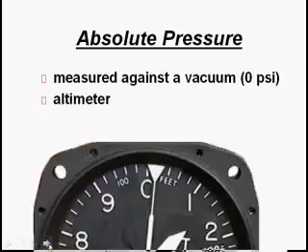It's calibrated to read low altitude under high pressure, that is, at sea level. It shows 0 feet, but that's really at a high pressure, 29.92 inches of mercury if it was a standard day. However, if you duct taped an altimeter to the side of the space shuttle and started going towards a vacuum, it would read higher and higher and higher. And if you had a magic altimeter that didn't break, it would read infinitely high as you got into space and there was no pressure. So here's the Kollsman window, and it doesn't quite read 29.92. Hopefully you've seen an altimeter before.

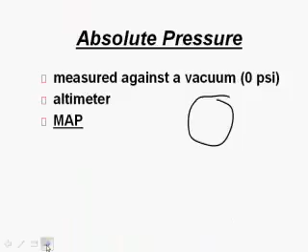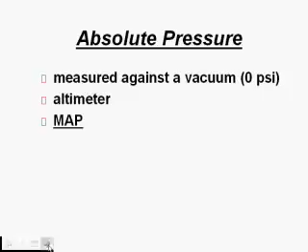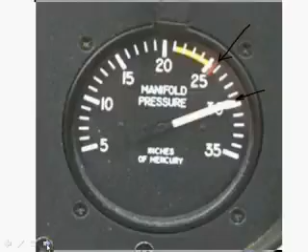Manifold absolute pressure, MAP, is talking about the manifold pressure gauge on piston-powered airplanes that have constant speed propellers. MAP is a 3-letter abbreviation for manifold absolute pressure. Here's a picture of a manifold pressure gauge out of a Robinson R22. Now this engine isn't running, so it's reading outside air pressure, and you can tell that it's just a little bit below 30 inches, so it's probably pretty close to a standard day near sea level. This manifold pressure gauge has a red line because they've derated the engine to produce less power than it actually can. That way it'll last a lot longer without failure.

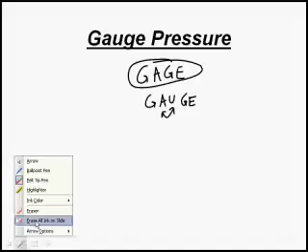Gauge pressure, just so you know, GAGE and GAUGE are both pronounced the same, and they have the exact same meaning. I usually spell it gauge because I don't have to remember which comes first, the A or the U, although I guess in alphabetical order A comes first, so maybe there is a way to remember it.

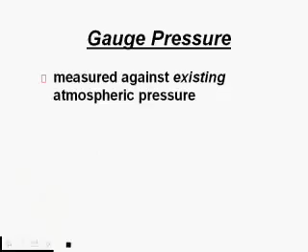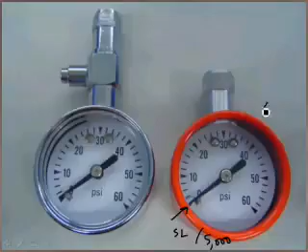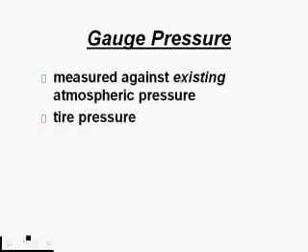Gauge pressure gauges display a pressure that is whatever is above the existing atmospheric pressure. A typical example is a tire pressure gauge, and these will read 0 whether you're at sea level or you're at 5,000 feet pressure altitude or at 10,000 feet pressure altitude. It's because there's actually a hole underneath in the back so that it can always reference itself to atmospheric pressure. And that works out pretty good for a tire pressure gauge, because you want to know what's the pressure inside of the tire compared to the pressure on the outside of the tire.

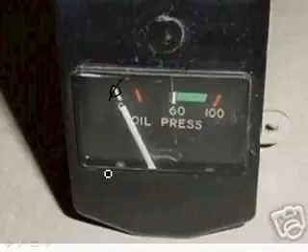Piston engine oil pressure gauges are also typically set up this way. Here's one out of a Cessna, and you'll notice that nothing's getting to it. This is actually taken out of an airplane, and it's reading 0. Again, it has a hole drilled in the back of the gauge so that the gauge knows what atmospheric is, and that's the pressure inside of a piston engine. It's vented to atmosphere, so you want to know what's the pressure of the inside of the oil system compared to outside atmospheric again. And hydraulic pressure is typically the same as well.

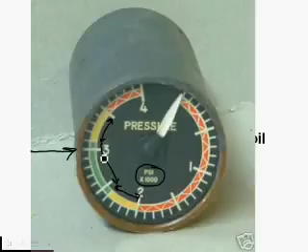Here we've got a hydraulic pressure gauge. This one is probably supposed to be at 3,000 psi. We've got here psi times 1,000, and there's a red arc. It's really bad if it's below 2,000. We've got caution between 2,000 and 2,400, and we've got caution between 3,100 and 3,500, and of course the lovely green arc between 2,400 and 3,100. Hydraulic pressure gauges are also a common gauge pressure gauge.

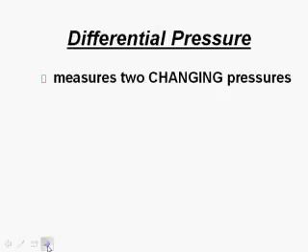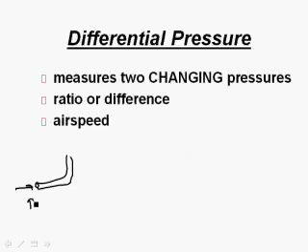Differential pressure, my personal favorite, is where you have two pressures that are changing at any moment, and you need to know the difference or the ratio between them. Airspeed indicators, for instance. Here's an airspeed indicator. Airspeed indicators take the outside air pressure and compare it to the pressure inside of the pitot tube. So if you have a pitot tube coming in here, we're going to have ram pressure, and we're already going to have static pressure in there, and it's going to compare it to a static port.

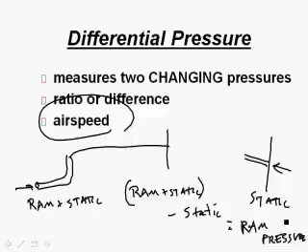And essentially the airspeed indicator is just going to take ram plus static, subtract static. That's going to give you ram pressure, but instead of displaying a pressure in psi or inches of mercury, it's calibrated to read it in indicated airspeed.

Engine pressure ratio. If you're flying jets, or you want to fly jets, this is going to be important. Here we got a jet engine, combustion chambers, air's coming in, air's blowing out the tailpipe. I need a longer exhaust pipe here. And there's going to be a probe. And air's going to get in that little tiny hole, and there's going to be a probe in the tailpipe, and air's going to get pushed into there.

Now when the engine's running, hopefully the pressure in here is really high, static pressure, and the dynamic pressure or velocity is also going to be really high, and hopefully in here the velocity or dynamic pressure is going to be smaller and the static pressure is going to be smaller. So this side here is always going to be larger pressure.

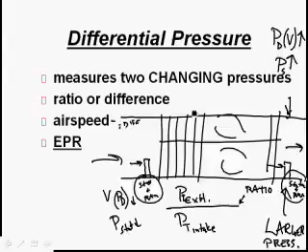And so effectively it's going to be the pressure right here, pressure in the exhaust, pressure total in the exhaust, pressure total in the intake. But this is going to be a ratio. It's going to divide it instead of airspeed where it's a minus sign or a difference. And we're always going to have this the pressure in here be static plus RAM, and the pressure in the EPR probe in the tailpipe is going to be static pressure plus RAM. And all this total here and this total here could all be changing. These two pressures could be changing all the time. In this case, we're just using a ratio of two different pressures.

So here's an EPR gauge. It reads 1.01. That's just a hair over 1. There should be a dot right there. And as you push the power lever forward in a jet, the ratio of these total pressures goes up. And here's a bug. So this is saying it's going to be about 1.9 for takeoff, probably is what that's being used for.

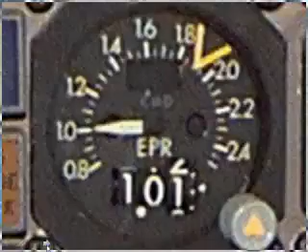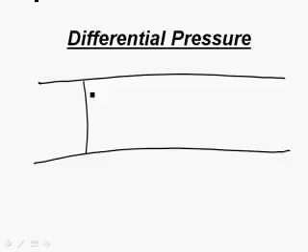Turbine engine oil pressure. See, I need some space to draw in. Here we go. Turbine engine oil pressure. Again, we got a jet engine. And we have bearings holding the shaft in place. And we're going to have some reservoir.

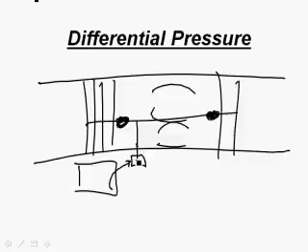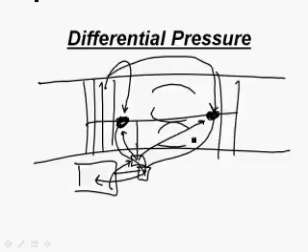And we're actually going to need a pump running off of the engine to suck oil out of the engine and then pump it to the bearings. And there's going to be another pump, a scavenge pump, that sucks the oil back, and pumps it into the reservoir. And a lot of times on jet engines we take bleed air off of the compressor and pump it into the bearing chambers, and this bleed air is going to go through the scavenge pump in here into the reservoir, and it's going to pressurize the oil reservoir.

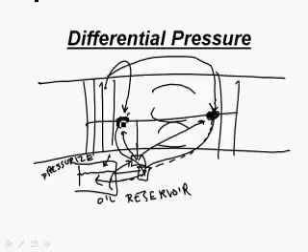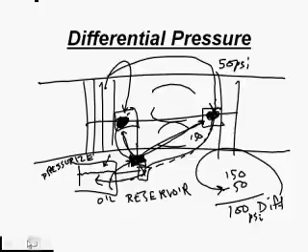And so it's also going to be pressurizing the bearing chambers. So let's just say that it's 50 psi coming from the engine compressor pumping into these oil bearing chambers. If the main power pump, the main pressure pump, pumps it in at 150 minus the existing pressure, means we only have a difference. You notice it's a minus sign. We only have a difference of 100 psi, and that's very typical with jet engine oil pressure gauges, since we're going to pump air into the bearing chambers, that we're going to need to know the difference between these two pressures. And so it's very common for jet engine oil pressure gauges to be differential pressure gauges. Of course, here's the low red line, here's the high red line.

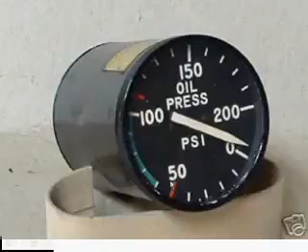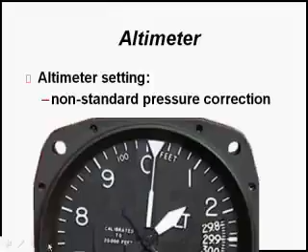Altimeters. And of course everybody knows about altimeter settings. They're for non-standard pressure correction. Of course I already mentioned the Kollsman window. So you can correct the altimeter for non-standard pressure.

Now what a lot of people don't understand or realize or think about is that you really need a temperature correction. Fortunately, temperature doesn't go that far off, and if you're up in the air you don't worry about it too much, because if everybody has the same altimeter setting, then everybody's going to be off a little bit. But generally speaking, we don't have in aviation a way to correct for that non-standard temperature. However, if you're going to be landing where it's really, really hot or really, really cold and it's IFR, you may want to look up non-standard temperature correction, because your missed approach point might be a little higher or a little lower than you might have thought. But generally we don't use standard temperature correction factors.

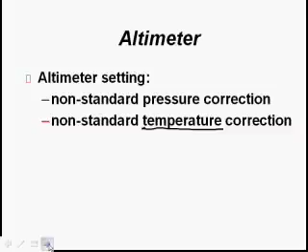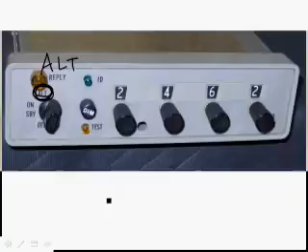Automatic altitude reporting systems, essentially that's your encoding altimeter. That's if you rotate the switch on your transponder to altitude, and that's transmitting the pressure altitude inside of your static system, and it's rounded to the nearest 100 feet. So let's say you're at 5,500 feet pressure altitude inside of the static port, inside of the static system. It's going to get rid of this 0, and it's going to transmit 550.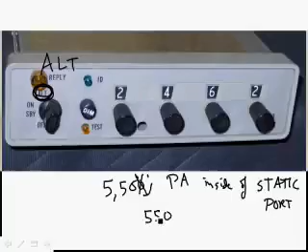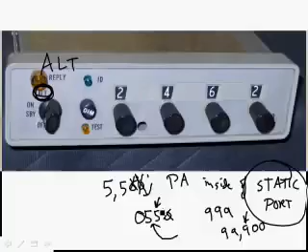It's not even going to transmit that one. It's going to transmit 055, and the air traffic control computers will put the comma in the right place. So if it transmitted 999, that would be 99,900 feet. It rounds it, or corrects it, to the nearest 100. And it's what's inside the static port. So if you set the wrong altimeter setting in your altimeter, your encoding altimeter transmitting your altitude rounded to the nearest 100 feet is still going to transmit the pressure altitude inside of your static port.

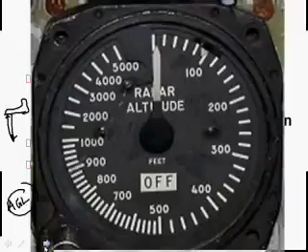Radio altimeter, radar altimeter, it means the same thing. It's essentially telling you AGL information. This is a radar altimeter out of an F-4 Phantom jet fighter, and as you're flying along, it sends down a radar wave, and it bounces back up, and it measures the time. So that's how it's giving you AGL. You typically don't find these in smaller airplanes.

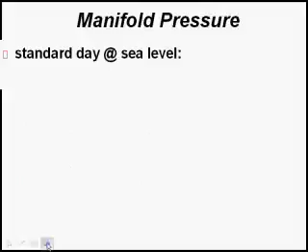Manifold pressure is found on piston-powered airplanes that have constant speed propellers, so that way you can set the power with the manifold pressure while the RPM stays constant.

On a standard day at sea level, you can measure pressure different ways. You might say it's 29.92 inches of mercury. Hg is the Latin abbreviation for mercury. 29.92 inches of mercury is the pressure on a standard day at sea level. Outside of the United States, altimeter settings are in millibars, and the altimeter setting would be 1013, and that's also equal to 14.7 psi. We already know 14.7 versus 29.92 is really, really close to 2.

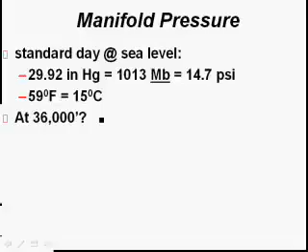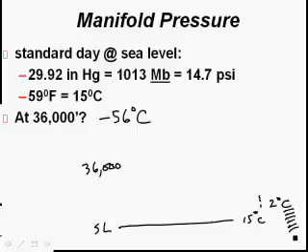Temperature, of course, you've known this. Hopefully, on a standard day at sea level, it's 15 degrees Celsius and also 59 degrees Fahrenheit. At 36,000 feet, standard day is minus 56 degrees Celsius. And in fact, that works really well. If we're at sea level and go up to 36,000 feet, we know it's 15 degrees Celsius. And every 1,000 feet, there's a 2 degrees Celsius change, the standard adiabatic lapse rate, and this is almost perfect. It only is off by like 2 degrees all the way up to 36,000 feet.

Interestingly enough, at 36,000 feet, it's the isotherm, and the isotherm goes all the way up to 66,000 feet. It varies a little depending on what book you read, but from 36,000 feet it's minus 56 degrees Celsius, and it stays that way all the way up to 66,000 feet. It's still minus 56 degrees Celsius. So from sea level up to 36,000 feet, we have a 2 degrees Celsius change, 2 degrees Celsius per 1,000 feet.

So at 5,000 feet, we could figure it out. It's really nice and easy. It's 15 degrees Celsius, we go up 5,000 feet, 5 times 2 is 10, so 10 from 15 is 5 degrees. So at 5,000 feet, it ought to be 5 degrees Celsius, on a standard day. Now we're not talking about sea level - the isotherm is from 36 to 66,000 feet, and on a standard day, it's minus 56 for that solid 30,000 feet in there.

The Armstrong line, interestingly enough, is based on pressure, and it's at about 64,000 feet. What's interesting - if you've ever made brownies or a cake at high altitude, you read the high altitude directions, it'll say do something different, put in a little less or more oil or water or flour, maybe cook it at a different temperature. It's because the temperature of water boils differently at different pressures. At sea level, water boils at 212 degrees Fahrenheit, which is 100 degrees Celsius. As we go up in altitude, the boiling point of water gets less. In fact, if we go all the way to 64,000 feet, the boiling point of water there is 37 degrees Celsius. Interestingly enough, 37 degrees Celsius is 98.6 degrees Fahrenheit.

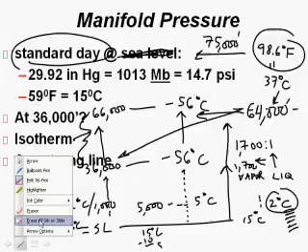This probably sounds familiar because your blood stream, most people's temperature is about 98.6 degrees Fahrenheit. What that means is if you're above 64,000 feet, let's say you're flying along at 75,000 feet, and the airplane depressurized, the pressure isn't going to keep the water in a liquid state anymore. It's going to start trying to expand to a vaporous state. Interestingly, the ratio of expansion from liquid to vapor is 1 liter of water turning into 1,700 liters of vapor. So your body is going to try to expand quite a bit. I think it probably wouldn't be very pleasant. So if you're above the Armstrong line, you probably ought to wear a spacesuit and have a pressurized cabin. That way, in case you depressurize, your spacesuit will save you.

And of course, we know the rule of thumb from sea level up to about 15,000 feet: 1,000 feet of altitude gives you 1 inch of mercury less. So at sea level if it's 29.92, and we come up to 5,000 feet, we take 29.92, subtract 5, and we get 24.92, which would be the approximate outside air pressure in inches of mercury at 5,000 feet on a standard day.

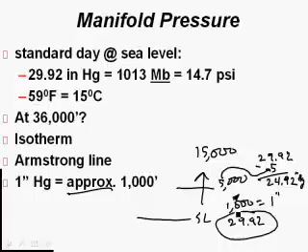Of course, every day is not 29.92. What's really cool is you can actually take the altimeter setting and do this calculation to check and see if your manifold pressure gauge is accurate.

So let's just say you're at sea level and the altimeter setting is 29.92. This makes it really easy. 29.92 minus 0, because we're at sea level, is going to be 29.92. So our manifold absolute pressure gauge on our reciprocating engine airplane with constant speed propeller, the needle's going to point to 29.92.

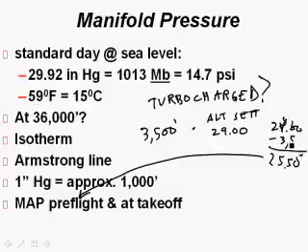You're going to read 25.50 inches of mercury during pre-flight. But if you have a gauge that looks like this, it's got a red line on it.

This is telling me, when I found this on the internet, that this is turbocharged. This is off a twin-engine airplane, it's hard to see, but there's 2 arrows in there, number 1 and number 2.

So this gauge is taken out of the aircraft, and it's showing a little over 22 inches. That's telling me it's not on the standard day at sea level, it's probably at a high-altitude airport where this was taken. But in a turbocharged airplane, you push the throttle all the way up to the red line. So you don't have to calculate what the takeoff manifold pressure should be. If it's a turbocharged airplane, it should come up to the red line.

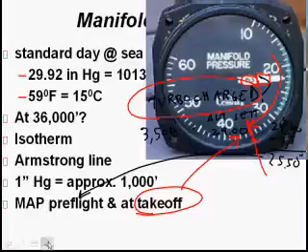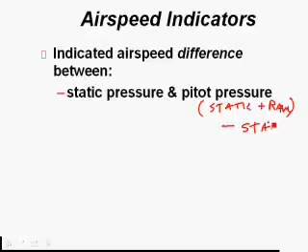Okay, airspeed indicators. Of course, I already covered the fact that airspeed indication takes the pitot pressure, which is really static plus ram, and subtracts the static to give us ram. But it's really calibrated and indicated airspeed instead of PSI or inches of mercury.

If you want to do true airspeed, of course you've tried this before. True airspeed, you can correct it for temperature and altitude, just like on those airspeed indicators, or you can do it with your whiz wheel. You have to say, okay, I'm at this pressure altitude and I'm at this temperature, and it'll change.

Essentially, the higher you go in altitude in general, true airspeed gets higher compared to indicated. So at altitude, you might be showing 100 knots indicated, but you might be doing 120 knots true. Now, you only have to get indicated airspeed to true airspeed by using temperature and pressure altitude until you're flying close to Mach 1.

As soon as you get close to Mach 1, you're going to have to take into account temperature and altitude and compressibility. Look at that, 3 I's in a row. Compressibility.

As you're flying along, if you got a static port coming in the wing, if you're flying up, like 0.7, 0.8, 0.9 Mach, it's going to be pushing the air in here and it's going to compress it. So you're going to get a higher pressure than you would otherwise, and you're going to have to take this into account if you're flying close to Mach 1.

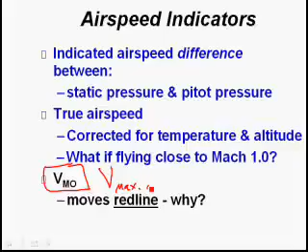Let's say, here's actually a picture. I've retouched it to make it look a little more clear. This is an airspeed indicator out of a Boeing 757 on the ground. Right now, it's showing 30 knots indicated airspeed. This is just a repeater in digital form for the airspeed indicator, probably just taxiing into the wind.

And this is the red line. But you'll notice this red line is a barber pole instead of a solid red line, and it actually moves. It's not painted on the gauge like it is in a smaller aircraft. You're only going to see VMO gauges in aircraft that are going 0.6 Mach or higher. So if you're going to be flying a transport category jet, big biz jet, big turboprop, you're probably going to see an airplane that's got VMO.

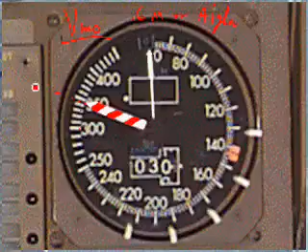Now at low speeds, all you really have to do is worry about flying so fast that you bend the airframe. So you notice right here, here's 300, 310, 320, 330, 340. This right here looks about 345 knots indicated airspeed at low altitude, and this is out at Phoenix Airport, so it's down at 1700.

So you could go really, really fast, 345 knots indicated airspeed, but of course below 10,000 feet, we're not supposed to go faster than 250 knots. Okay, so that's so fine.

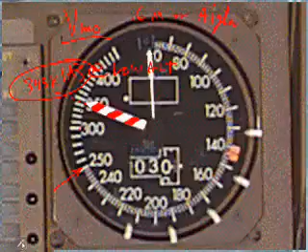What's the big deal? Here is this same exact gauge at cruise. Now we're doing 277 knots indicated airspeed, which is just a repeater for this gauge right here. Here's 250, 260, 270. Sure enough, there's 277, but this also shows Mach. This has a Mach meter, 0.813.

Now this airplane probably has a red line of 0.82 or 0.83, maybe 0.84. You'll notice right here, this indicated barber pole, or VMO, it went from 345, and now it's all the way down here. There's 280, 290. It looks like now it's doing about 293 knots indicated airspeed. It got lower at altitude.

VMO gets lower at higher altitudes.

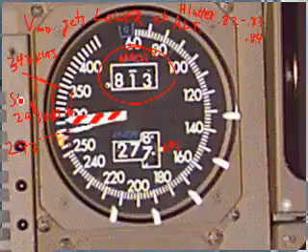So I'm going to say that, I'm going to have to draw you a picture. I need to get a clear screen here. Negative Mach effects.

There, we're going to go with negative Mach effects.

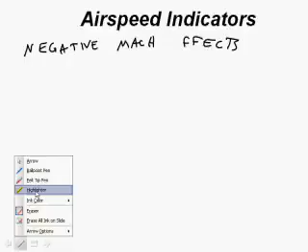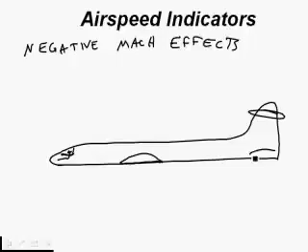Let's say we've got our transport category jet with our asymmetrical wing, and there's somebody in the cockpit flying the plane. Got a tail, let's put the tail down here.

Now as you're flying along, the airflow is going to go above the wing and below the wing. Of course, if the airspeed is, say, Mach 0.80 - we'll use the FAA's definition, the FAA says the transonic range is 0.75 - so let's say we're going Mach 0.75.

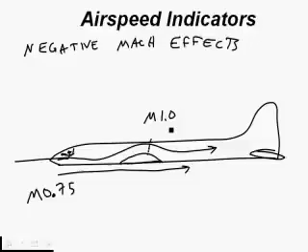So this airspeed underneath the wing is going Mach 0.75, but the airflow on top of the wing is going to go faster. It's very possible that right here we'll have Mach 1.0, and we're going to have a little shock wave and some turbulence, and it may reduce the effectiveness of the tail.

If we go faster and faster, so instead of going 0.75 we go Mach 0.85, this turbulence could be enough that the tail becomes ineffective.

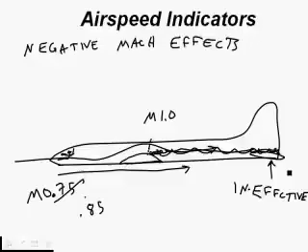The tail is holding the airplane down, so if the tail goes up, the nose of the airplane would go down. This is called tuck under.

Tuck under is when you lose effectiveness of the horizontal stabilizer. It doesn't keep the tail down anymore, and the nose goes down uncontrollably.

And if the elevator's not doing any good, you can't stop it. When the nose goes down, you go even faster and it makes it worse. Don't you hate that? The other thing is called flight control buzz.

Flight control buzz. Let's take a closer look at a wing, and here's an aileron. So if we've got a shock wave because the airflow across the bottom is 0.75 and the airflow across the top is 1.0...

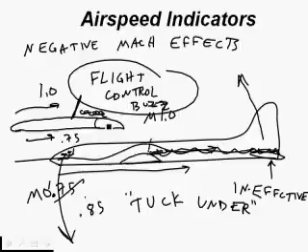We've got a little turbulence going on. This turbulence is going to affect this aileron - I can't spell aileron, okay - and so the aileron is going to vibrate up and down a little tiny bit.

And if you're in an old school airplane where this is controlled by cable, you could actually feel it on the control in your hand. Or if you're in a business jet that still has control cables, you're going to feel some of that buzz.

It's okay to fly fast enough so that you have a shock wave and turbulent airflow going across the tail, and it's okay to fly fast enough that you get a shock wave that gives you some flight control buzz. The transonic range, according to the FAA, is 0.75 to 1.25, and most red lines for transport category jets are somewhere around 0.84, 0.85, something like that.

Which means the beginning of the transonic range, 0.75, is the lowest forward speed of the aircraft where somewhere on the airframe you're getting Mach 1.

So even if we're cruising along at Mach 0.75, the airflow across the top of the wing at some point could be Mach 1.0. We're flying in the transonic range.

It is normal to fly inside the transonic range and have these effects going on. But if they get too bad because we go too fast, then we're going to be really, really unhappy. The aileron could become ineffective as well if this got too bad.

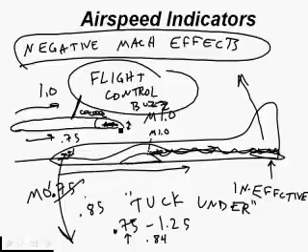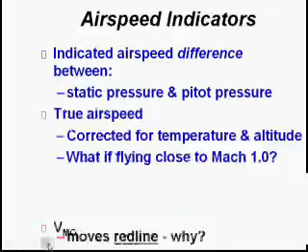So that's why we have - wrong direction - that's why we have a VMO gauge at high airspeeds. At high airspeeds, this line right here is going to keep us below a Mach number that will have negative Mach effects so bad that we'll lose control of the airplane.

If we let the indicated airspeed go higher than VMO, then those negative Mach effects will be so bad that we could lose control of the airplane.

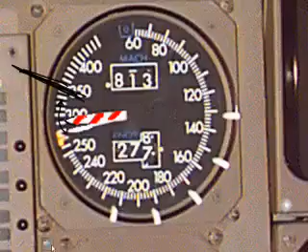We're not going to bend the airplane until we get a lot lower - that's not what we're worried about. At high altitude, we're worried about making sure the negative Mach effects don't go so bad that we lose control of the airplane. At low altitude, we're worried about bending the airplane. And of course, the only thing in the Earth's atmosphere that changes Mach is temperature.

And so if you have a Mach meter inside of the airplane, you're going to have a temperature probe stuck out on the side of the airplane so your Mach meter or your air data computer can calculate what your Mach is based on your static pressure and your pitot pressure.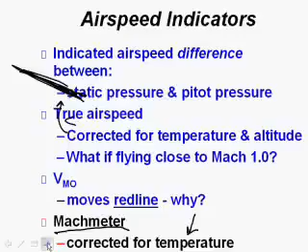Oh, there was that true airspeed indicator where you can rotate this knob and you would set temperature to pressure altitude. I must have inserted it in the wrong place. I'll get over it. Okay, pitot-static systems.

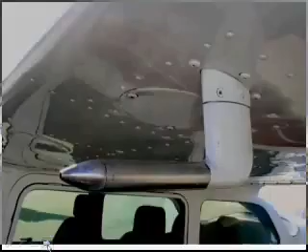Of course, this is pretty, you've seen all this before. There's a pitot tube for a 172. Here's some pitot tubes for some fast jets. Of course, we've already covered it. Inside the pitot tube is the static and the ram pressures.

And you're going to send this pressure to airspeed indicators, to Mach meters. If you have some kind of a warning system, like for stall or for Mach overspeed, that system is going to need this pressure. ADC stands for Air Data Computer, and you'll learn a lot more about that sort of thing when you take the AS358 Advanced Avionics.

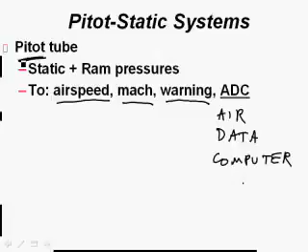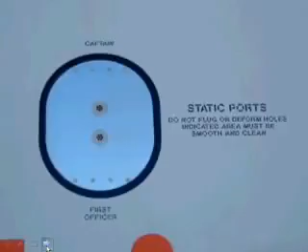But that pressure in the pitot tube is going to have to go to 4 different places if you're in a transport category jet, big biz jet, big turboprop. The static port, of course, here's one off of 172. Here's one off of a big honkin' jet. It actually says captain, and here it says first officer, so there's actually 2 static ports on this airplane, at least on that side of the airplane. Of course, it's only static pressure, but you're going to send it to a lot of places.

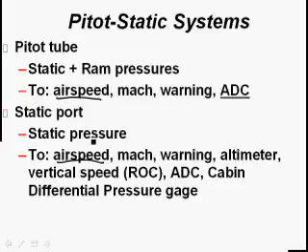Of course, the airspeed indicator needs both the pitot pressure and the static pressure to decide what airspeed you're going at. Same thing, the Mach meter is going to need both pressures, and if you've got a Mach warning or stall warning based on airspeed, it's going to need both of them. And of course, your altimeter and your vertical speed or rate of climb, those need static pressure. Of course, that's just a review for most of you.

And of course, the air data computer. Air data computer is going to calculate a bunch of stuff. It's going to calculate true airspeed, Mach. It's going to calculate a lot of information to send to the flight computer that's flying the airplane.

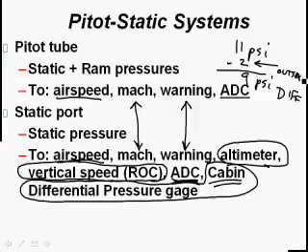And here's a really fun one: the cabin differential gauge, the cabin differential pressure gauge. Remember, that's the pressure on the inside of the airplane subtracted from, and then you subtract the pressure on the outside. So if you've got 11 psi on the inside and there's 2 psi on the outside, you'd have a 9 psi differential. So this outside pressure, hey, that's what's going to be in your static port.

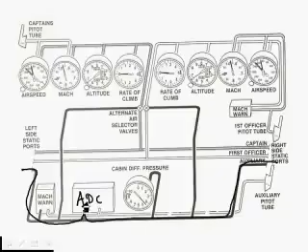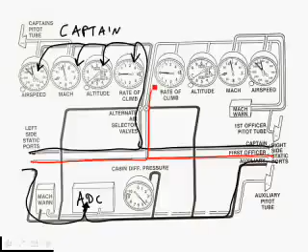And here's the aircraft commander, here's the captain. Captain's static port goes to the rate of climb, the altimeter, the Mach meter, and the indicated airspeed indicator. And of course the captain has one on that side too. I guess I could use different colors. Yeah, sweet. So the co-pilot has a static port on each side of the airplane, and that goes to the co-pilot's rate of climb, altimeter, Mach meter, and indicated airspeed indicator.

So we got static. Oh wait, and I forgot, the static system also goes, this other static system also goes to the cabin differential pressure gauge.

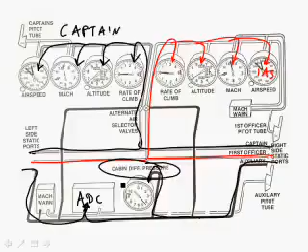Then we're going to have pitot tubes. Aircraft commander's pitot tube goes to the indicated airspeed and to the Mach meter. Co-pilot's pitot tube goes into a Mach warning system, indicated airspeed, Mach meter. And then look, here's a third pitot tube which runs the air data computer and another separate Mach overspeed warning system.

So on a transport category jet, big bizjet, big turboprop, you're going to need more than two, commonly three pitot-static systems to run the captain's gauges separately from the first officer's gauges, separately from the air data computer, so that if any one quits, then you still have another two sets of really good, accurate information.